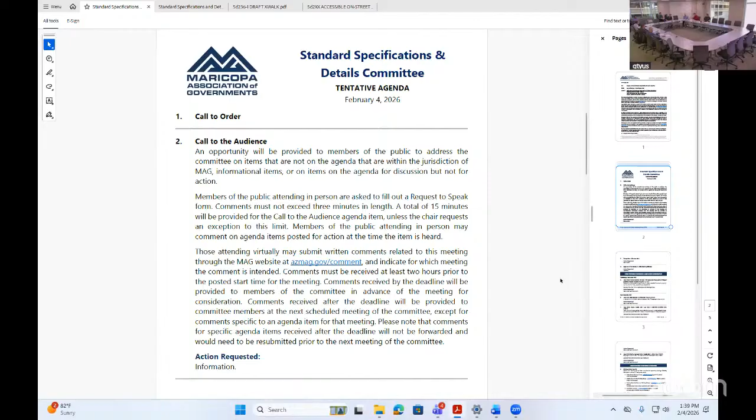Vice chair: If I can say one thing, Jose, yes, it's been a pleasure chairing with this group. I mean, these guys are amazing, there's a lot of talent in here. I really brag about this group all the time. So thank you, we're welcome to have you, and thank you for agreeing to be my vice chair my first year as well.

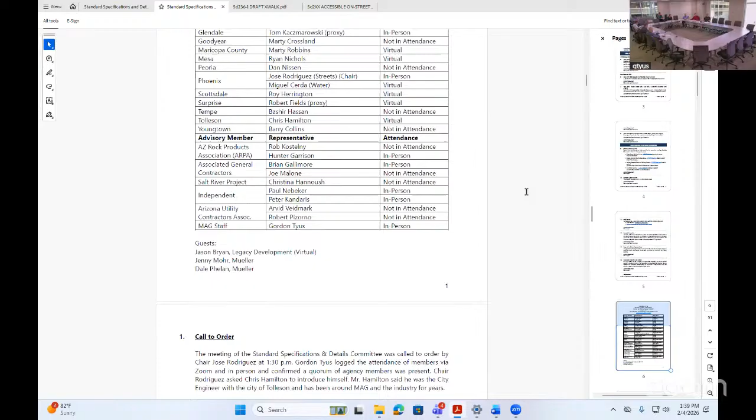So with that, we'll move on to the next item, the approval of the last meeting, January 7th meeting minutes. I think these were shared on the agenda packets when they were distributed. Does anybody have any questions from the MAG member committees? Or is there anybody from the public that wants to make a comment on the meeting minutes? Just take a few minutes to glance through it and let me know.

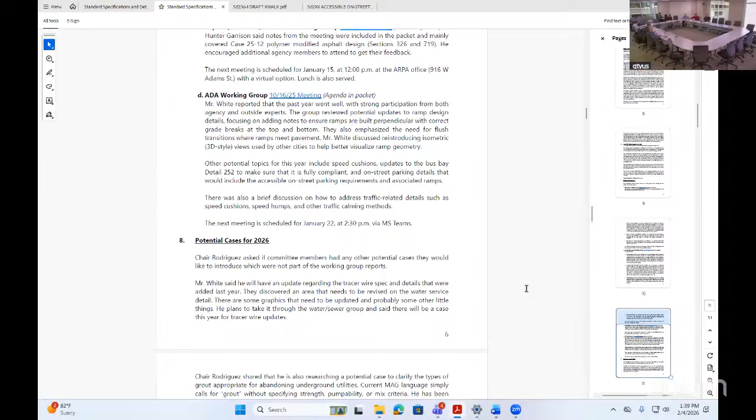And Gordon, just to confirm, I think you incorporated any revisions that we received through the reviewer, right? Yes, that's correct. I sent the draft minutes out to the chairs and case sponsors for their review and incorporated any of the changes that they had. But if there's any that we missed that other members have noticed, let us know and we'll get those corrections made as well. Also, while I have the mic, we have just a bare minimum for our quorum, so please try and stay for the entire meeting if at all possible. Thank you.

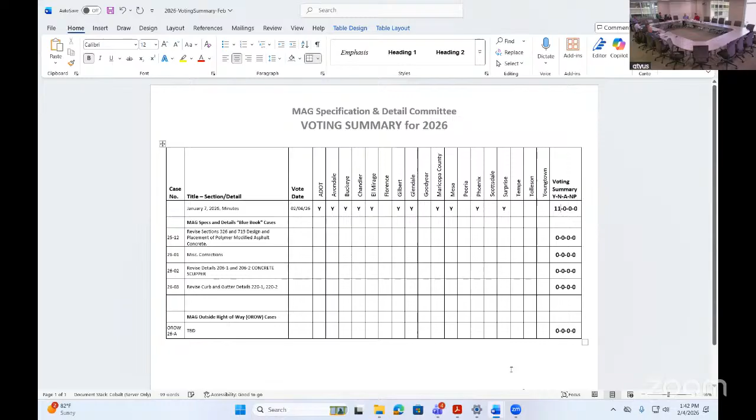All right, we'll move forward into our cases. The first is our rollover case from last year: revisions to sections 326 and 719, design and placement of polymer modified asphalt concrete. Alex, can you give us an update on that?

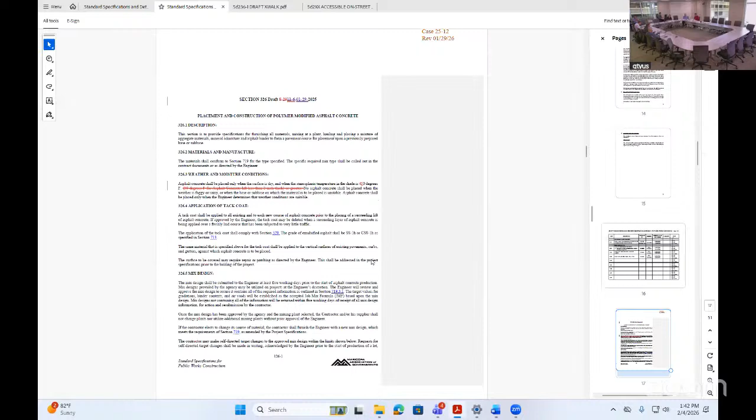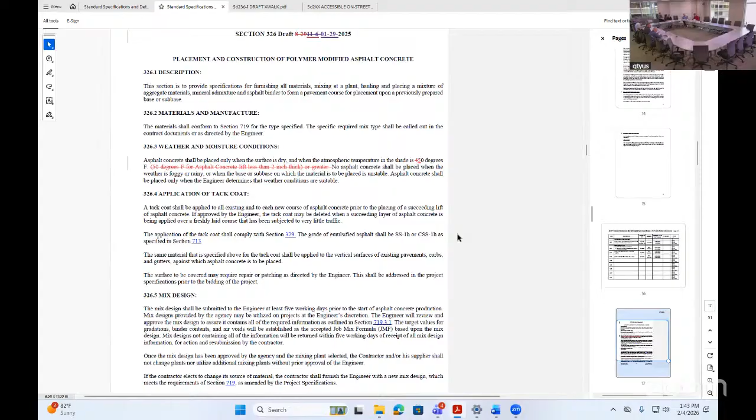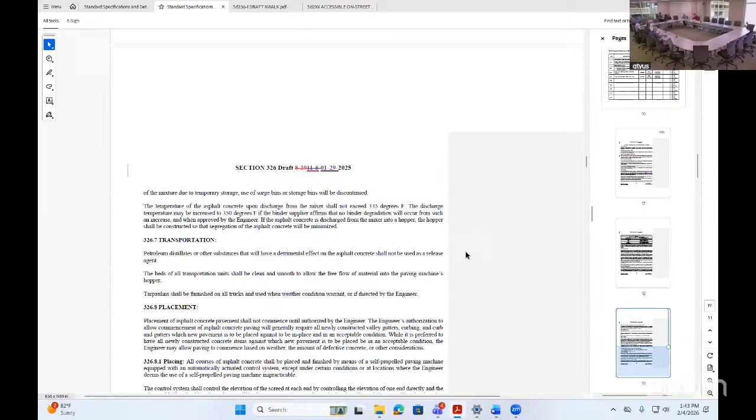Absolutely. A lot of work's been put in here by a lot of members of this group. We've had quite a bit of interest, and worked very closely, especially with the city of Phoenix and some of the East Valley agencies. There were a couple minor revisions to some language and clarification, specifically regarding the performance analysis and aging protocols. We think this is a pretty concise document as written, and we were going to move it forward for a vote next month if the committee saw fit.

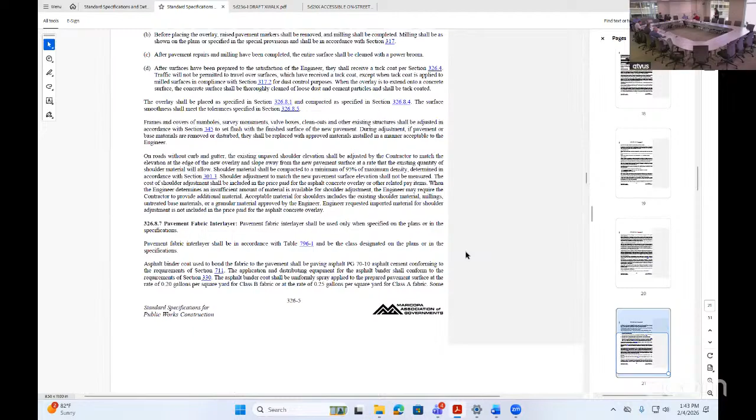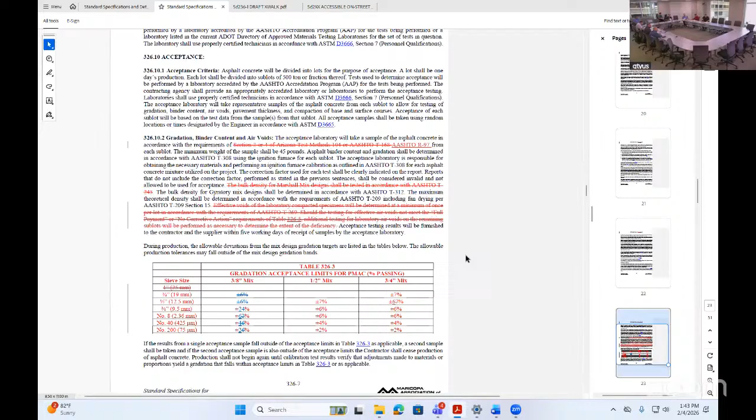Does anybody have any questions on this case? I know we discussed it quite a few times. Any comments coming up on your heads right now?

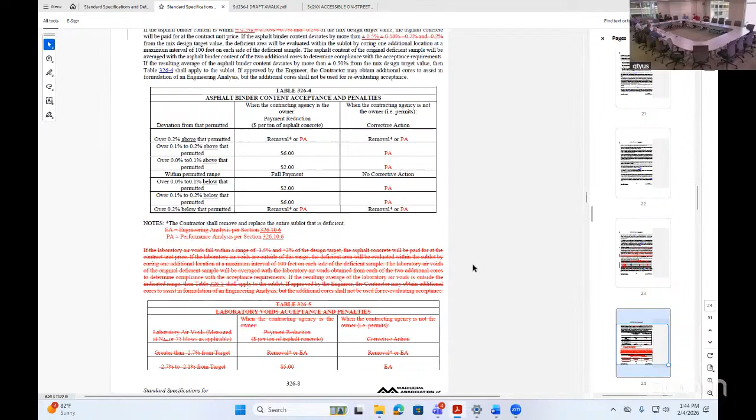I will say, Alex, as I was reviewing this, there are some comments that I'll get with Parnian at the lab, probably just to clarify. Previously the engineering analysis had language that needed to be done by a professional engineer and all that stuff, where we probably want to replicate some of that. And also, I think the qualifications for the lab performing the performance testing.

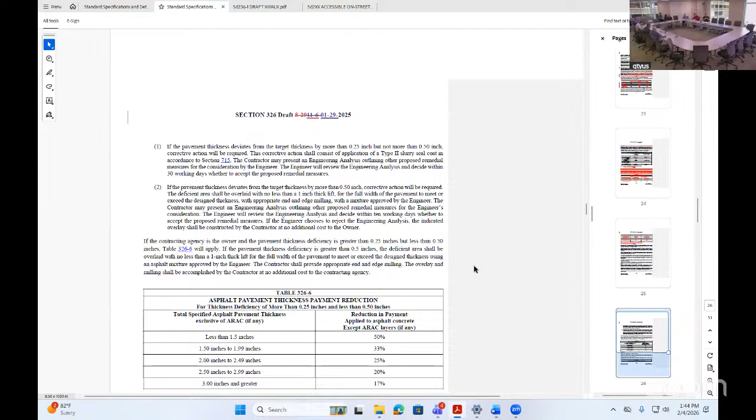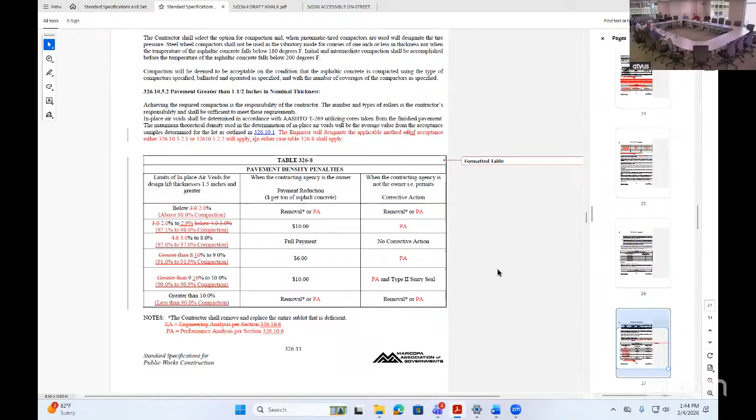Okay, I appreciate it, thank you Mr. Chair. The qualifications, Jose, I think we put language like if they were on your approved list, because you guys had a list of approved labs, is what we've done in the past. Yeah, something along those lines. I just didn't read that in the performance testing section.

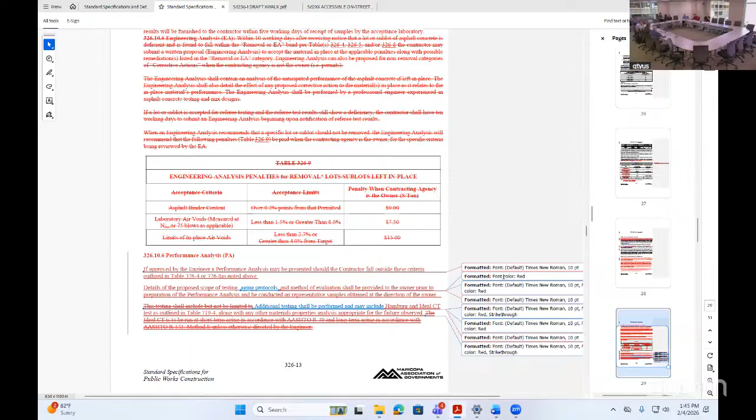Okay, because I think we might be limited, right? There are not a lot of labs performing that. Yeah, those tests are pretty specialized. But because of that, we kind of want to make sure that the lab performing those tests knows what they're doing, because they get very sensitive.

Yeah, she's been at all the meetings with us, so anything you get with her, we can tweak whatever language they want in our next meeting. And if there's any other members that have any comments, hopefully they can get back to you, Alex, and hammer it out at the next materials working group, and we can put it to potential action at the next meeting. Excellent, yeah, we'd love to see this move forward. There's been quite a bit of interest, so I think this is great. Thank you.

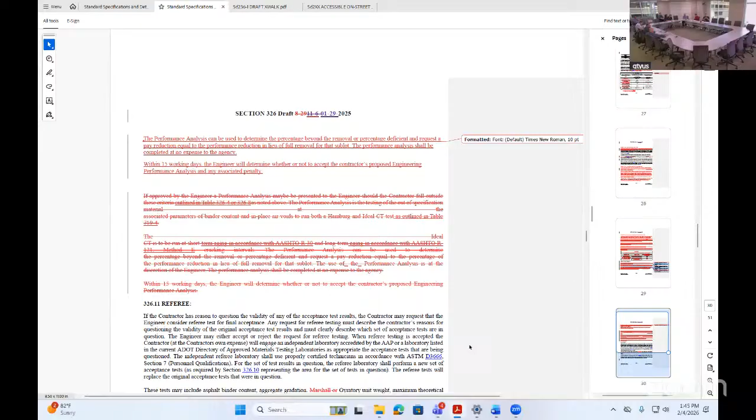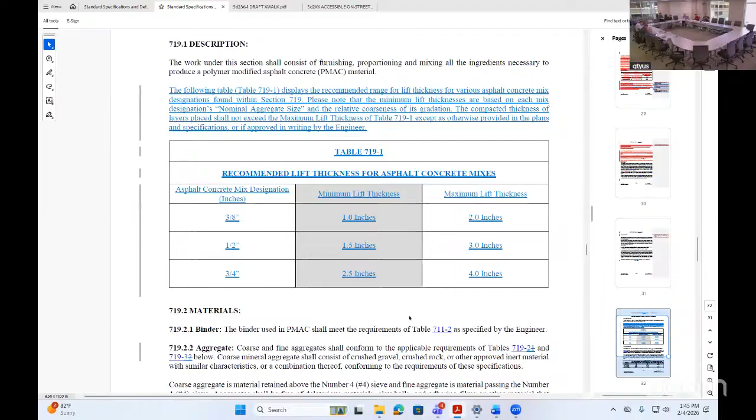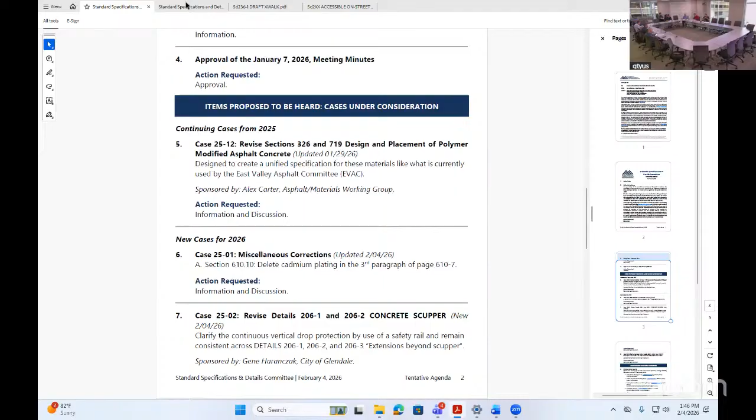All right, next, the first case for 2026, miscellaneous correction. I think there is no other item on the first item, Gene, correct? I think we presented that last time: the deletion of cadmium plating from the specification. I know at one point there was some discussion to make this another case. I just want to confirm whether or not it's gonna stay as a miscellaneous correction.

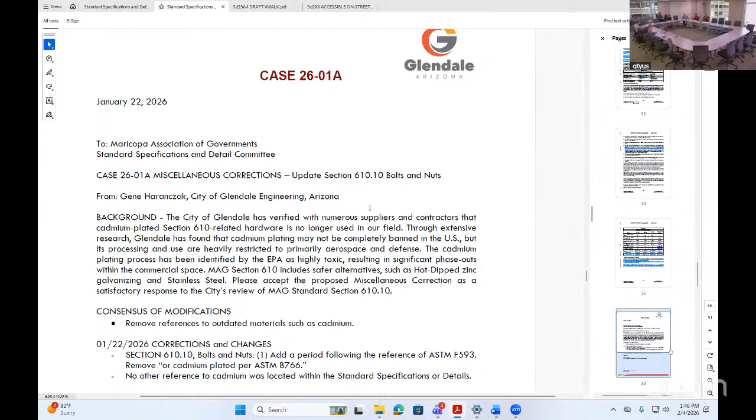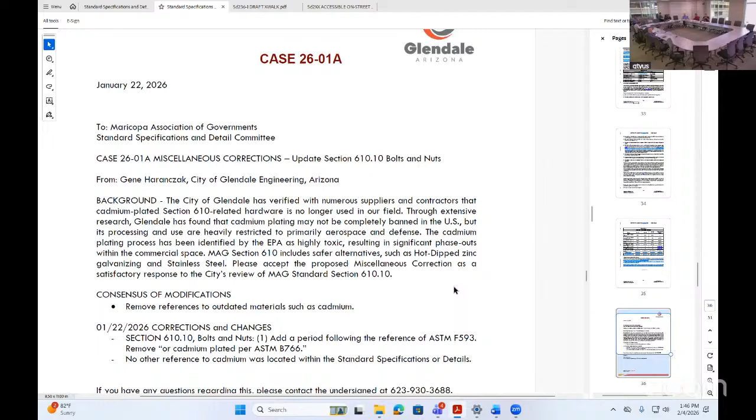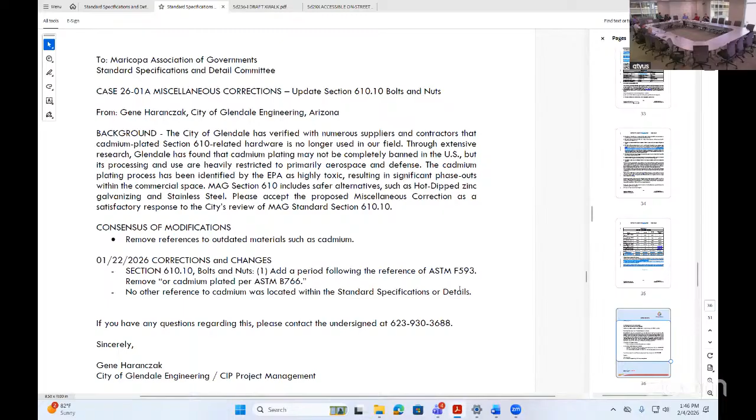Yeah, I would request that we leave it as a miscellaneous correction because we're just deleting an outdated process. The zinc coating, from what I found, is the galvanized process that's already called out in MAG. So being that cadmium hasn't been used in so long, we can just delete it out. It's not even available - I checked with many of the local suppliers, and they said they haven't supplied cadmium in quite some time. All right, simple change.

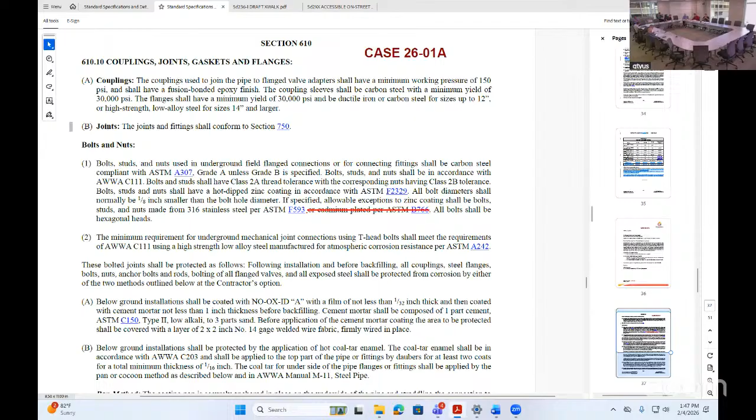There are no other miscellaneous corrections for this so far. Next case: revisions to details 206-1 and 206-2, concrete scupper.

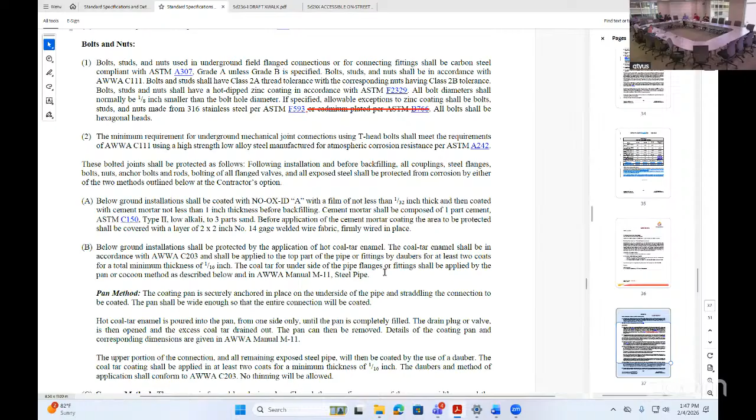Gene, can you interpret please? So that one in particular, I reached out to industry, asked Brian Gallimore here to run it through his group, to see if I was on the right page with how I was interpreting the detail. When I was chair, I received a few calls for clarification about that 1 inch at the gutter pan. I ran it through Brian's group, and they came back with responses basically in line, perfectly parallel with what I'm illustrating here. So it's just to clarify the measurements basically.

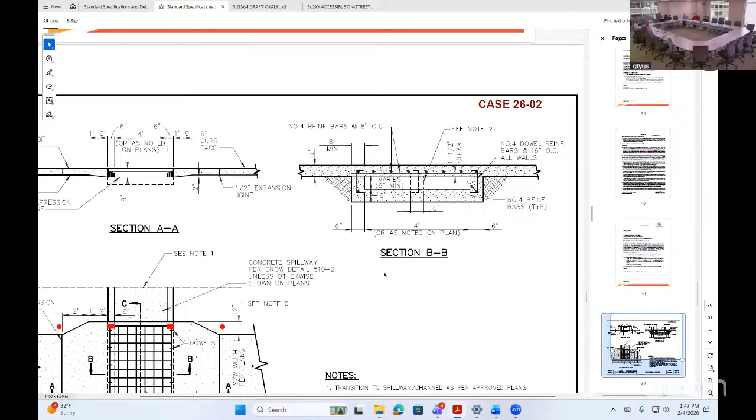Oh, I'm sorry, I thought... No, we were talking about the scupper. So this is the scupper. I'm sorry, let me retract - the extension of that, the safety rail on this.

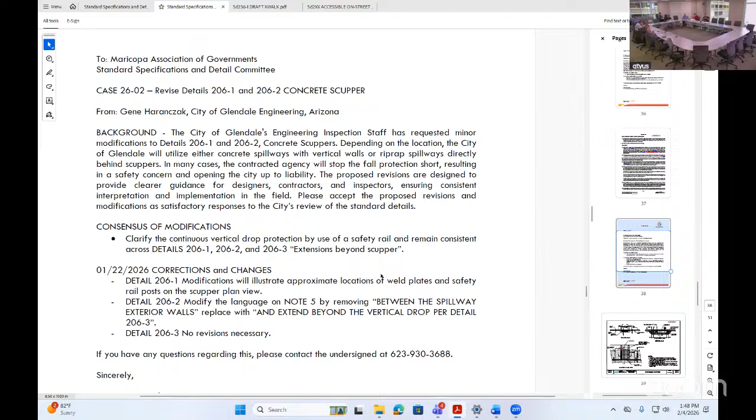So this one here, we're having a problem in Glendale with the scuppers falling short. The way it's currently written is that it stops at the edge of the spillway. We're using a lot of riprap channels, so the safety rail isn't extending past that vertical drop. So we just want to carry that language over to capture all the details.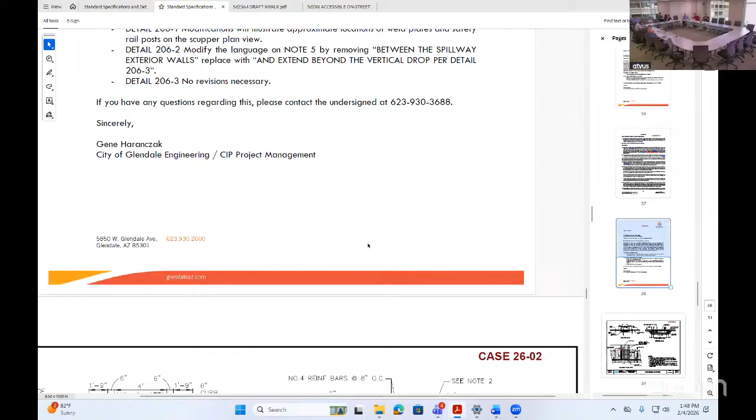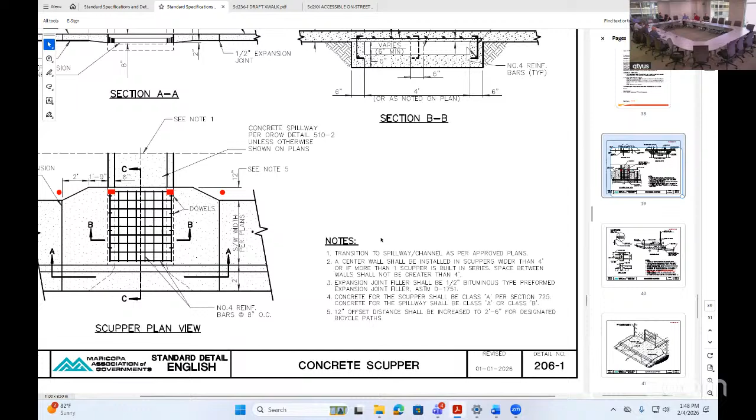It's going to be the 206-3, which clearly shows the rail going across, but what's happening is they're just stopping it right at that angle point on the back of the scupper. So on the first detail, 206-1, if we can just show those two weld plates - the direct bury would be per detail 145. And then we just slightly modify one of the notes there to extend beyond the vertical drop per detail 206-3.

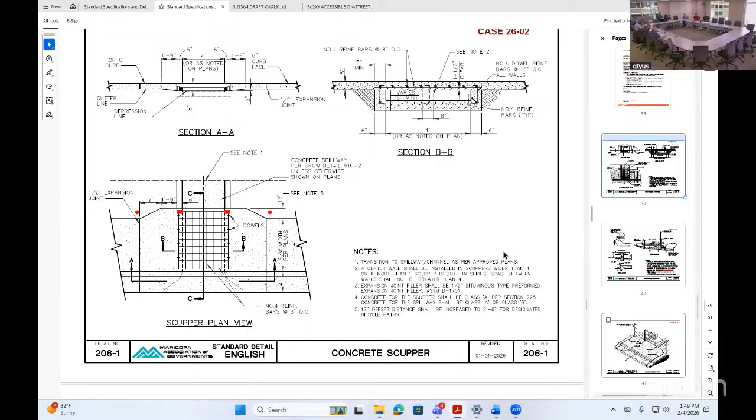That would help us out a lot in the field, not having to have contractors come back and spend time out in the field trying to sort through all this. It would really clarify things - I think it's fair for us, and fair for the contractors because they don't want to come out and mob twice to go weld on additional rails. So that's what really brought this case up. The inspectors kind of pounded on me for it.

Just a question for you, Gene. Now, so the extension of that rail, even beyond the actual fall off, because there may be landscape area where you're actually meeting grade at that point, right?

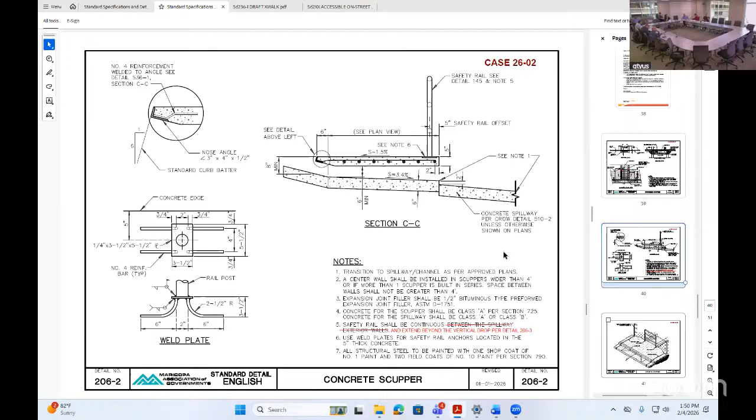Right, just for consistency, and that's why I left it open as beyond the vertical drop - so that we're capturing that vertical drop. Now, the drawing clearly shows it at the expansion joint, or right there adjacent to the expansion joint, which, if you want to fine tune that language a little tighter, we can.

I personally think it works pretty good the way it is. Beyond can be interpreted, though. I totally understand - beyond can, I mean, where are we gonna stop, you know? When we get to Chandler, you know?

We touched on this a little bit - the 30-inch measurement that Warren brought up. Yes, what would - oh, thank you, Brian. Yeah, there was a discussion at the ADA working group of what would trigger the safety rail, so that we are not improperly adding safety rail where it's not required, because it becomes a maintenance headache at one point.

But I think in this particular case, the intent is kind of showing what's already on detail 206-3. Sure, I would agree with that 100%. And our whole outlook on this is behind the sidewalk for landscape, we generally have a 1-inch reveal, then you have your landscape rock. When you have anything more than that, you're opening yourself up to liability, right?

Wheelchair goes off, tumbles down. I think if we modify the same language any more, we would maybe just say, instead of beyond the vertical drop, we could capture the vertical drop and maybe to the expansion joints, because that's generally where the wings of our riprap channel stop - right about there - and we try to capture that vertical drop. And the way it's drawn on -2.

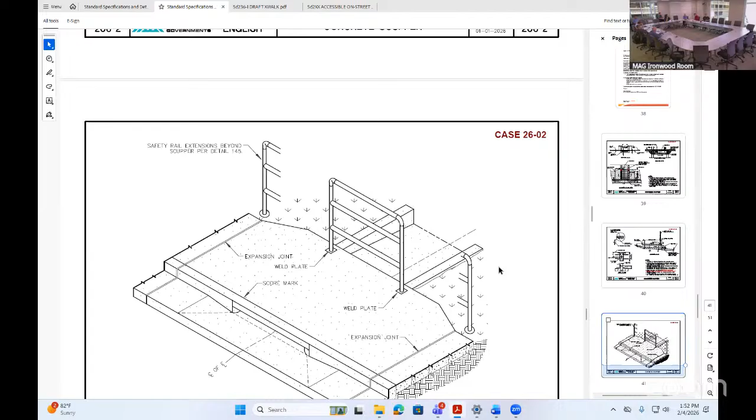Oh, I'm sorry, no, not -2. Are you looking at -1 or -3? The way it's drawn on -3, it's drawn right at the vertical supports there, right at the spillway. But then the note says between the spillway exterior walls. And that's my challenge - I need to get beyond those spillway exterior walls because I don't have any, so I need to just capture the vertical drop. And that's really the motivation behind the change.

Question for you, Gene, if you don't mind. So the note you're proposing says beyond the vertical drop - is there an elevation drop at which the safety rail becomes necessary? Because I'm thinking street side, you've got a 6-inch drop everywhere, and no safety rail, obviously.

So, because you had mentioned if you normally have a 1-inch reveal on the backside of the sidewalk to landscaping, anything more is liability - but is there a certain elevation change where the safety rail becomes necessary versus not? I don't know if there's a hard, fast rule.

I know anything over 1 inch could be an issue, potentially. I could look into that and come back and see where that's derived from. But really, the goal is to keep a wheelchair from going off into that riprap, right?

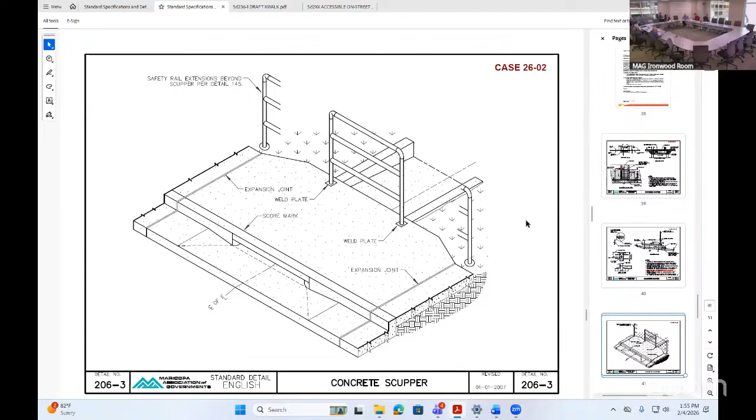Mr. Chair, yes. I was trying to remember in our discussions, somebody put in the feed and I meant to take a note of it, but it wasn't OSHA. I was always thinking it was OSHA, but they found it in another design standard where 30 inches was the stated figure.

Yeah, 30 inches is building code, but it was beyond building code. It was something else—a highway design standard. What is the other? AASHTO. Oh yes, AASHTO is what it was stated. So maybe check out AASHTO and see what you think of that language too.

Yeah, that's probably more for your head walls, I would imagine. And I think I'm with you, Gene. I think we just need to clarify this particular scupper detail. I think we were looking into potentially modifying the actual safety rail itself or its application.

That detail, I think 145, we'd be having the conversation about the drop, but if you disconnect the required limits from the vertical drop, then that falls out of question. Okay, fair enough. Thank you. Thanks, guys.

This is Peter. I had a question or a thought on this. Is it okay for me to talk? I can't tell very well if I'm communicating. Go ahead, Peter. Okay, good.

So this gets me to think about—this is an issue that really, I think you're dealing with the scupper issue correctly, but do we have a specific issue that should be addressed behind the sidewalk in all cases? It sounds like certain municipalities do address it, certain don't. Is this something where, with the appearance of a slope behind the sidewalk, would require some kind of protection system? I'm just throwing that out, irrespective of this case. Is that something this committee would be interested in?

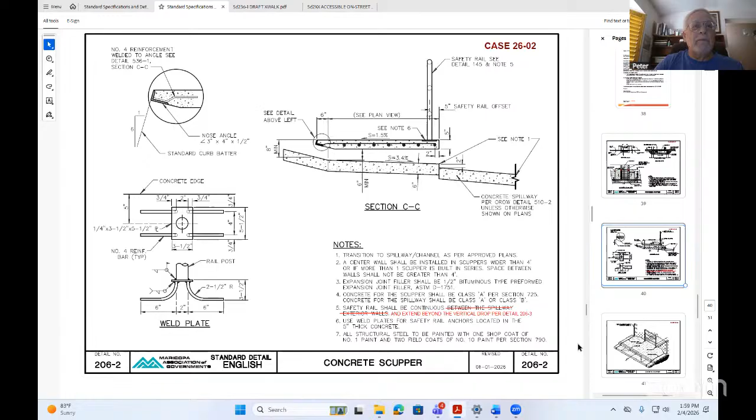All right, next item. Or, I'm sorry, does anybody else have any other question or comments on the scupper detail? Nope. Mr. Chairman, this is Josh Ford, City of Buckeye.

Hey Josh. If we're cracking open this detail, one comment I'd have is that slope on top, the view you're looking at right now shows 1.5%. I know with the sidewalk detail we modified that to say target slope 1.5% from top of curb, and on the 230 sidewalk detail we have a note about slope tolerance, 0.5% to 2%.

I'm proposing that we include some similar language about target or giving some type of tolerance, because I know we dealt with a contentious scupper issue before where there was lots of back and forth over the slope on top and the slope on bottom. Just looking to maybe make this consistent with what we're doing on detail 230.

Great point, Josh. Gene, is that something you can look at - to see what the slope callout is for the sidewalk detail and just match that so it's consistent? Yeah, because right now S equals 1.5% on the 206-2 detail. Okay, so yeah, I'll make sure it stays consistent with 230.

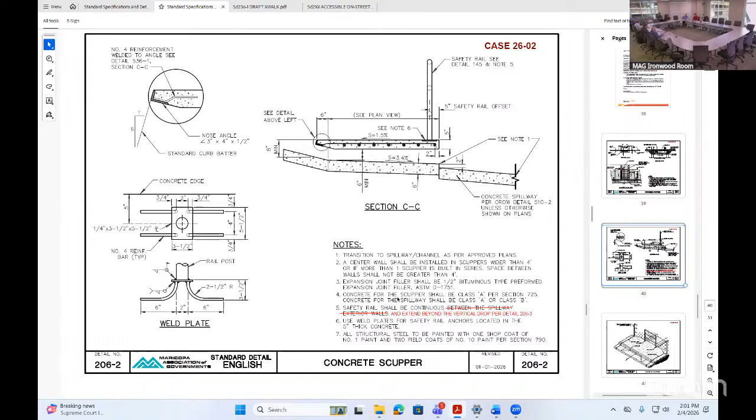Thank you for that. Absolutely, thank you.

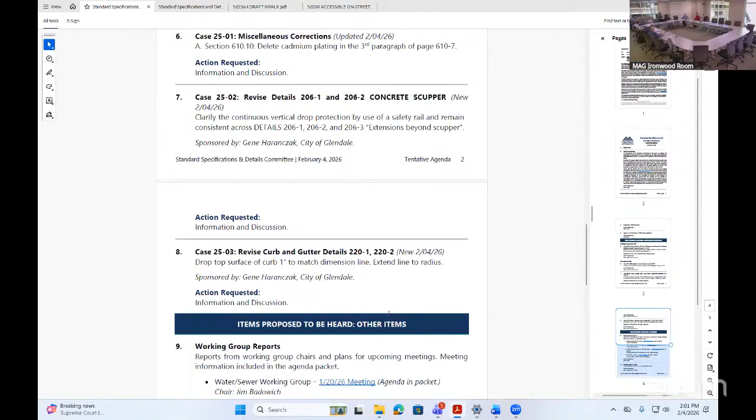Next case, 2603, revisions to details 220-1 and 220-2, curb and gutter. Gene, is this your case as well? All right, walk us through it.

Mr. Chair, I was so excited to get to this case, I couldn't wait. This is the case I received many phone calls on as chair, just looking for clarification on some of these measurements. This is also the case that I handed over to the Associated General Contractors and had them look at it.

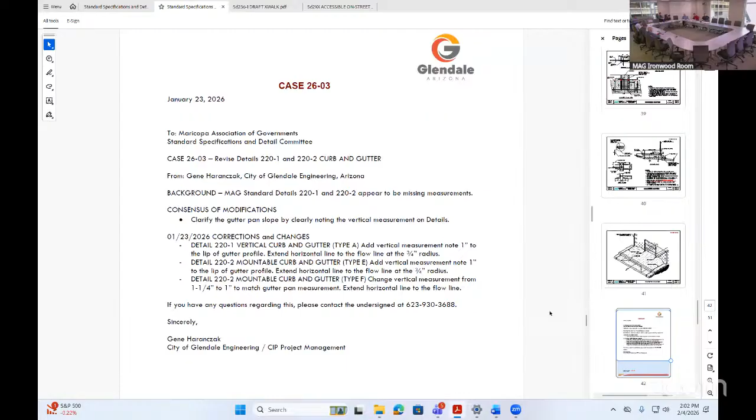Their response was consistent with what I'm showing here on these pages. They were in 100% agreement with these notes. So it's simply to clarify this. I don't think this warrants a miscellaneous correction - I think it warrants an actual case, in case anybody wants to add more to it. So with that, I'll open it up.

No, I don't think so. Most of them were worried about the bottom - the bottom's usually cut flat, you gotta have that. The real critical one is your designer - like when they put 2% cross slope in your roadway and design to a flow line that's an inch lower than the lip of the gutter, but we're paving to the lip of the gutter a 1/4 inch above. So it throws your slope all off, right?

And we've had that argument with designers saying, hey, look at the detail, we gotta pave a 1/4 inch above, and you're designing from center line to flow line - it doesn't match, right? And your mic's not on.

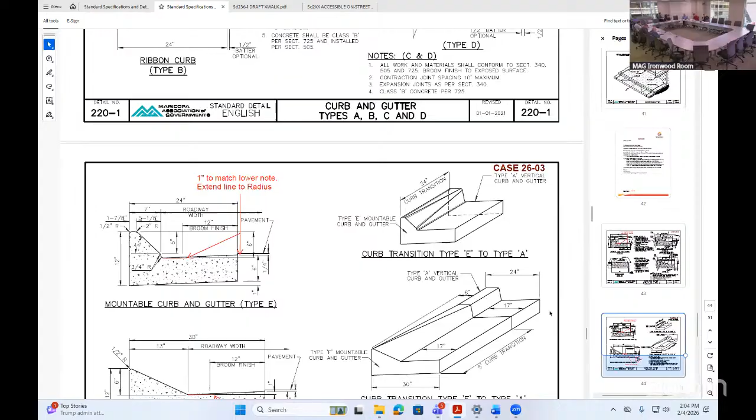Just missing measurements as far as I can tell. And as I'm looking through the case, is this just being carried across all the different types of curb and gutter details? No, that's correct. Any ones that were missing the measurement, that is correct.

Based on Brian's comment, are we thinking of flattening out the bottom of those? Actually changing the drawing and flattening it out, or? If I may, I don't want to get into that because then we're going to throw yields off potentially. The way it's drawn right now, they are keeping some kind of, when they grade that road, they're probably grading through the curb and gutter subgrade with some slope. But really the trick is I don't want to throw their yields. If I make that flat, that little wedge might not be much over 10 feet, but through a whole subdivision, it's going to add up.

You could make that 1 inch at the bottom optional. That's what I found out when I asked everybody, right? Some of them do, some of them complained about yield. Some say we just cut it flat or trim it, using a trimmer in front of the curb machine. And I did get some pushback from contractors. I had reached out separate from you, and they had mentioned the same thing, that their yield would go up. I mean, they'll have to adjust their pricing accordingly.

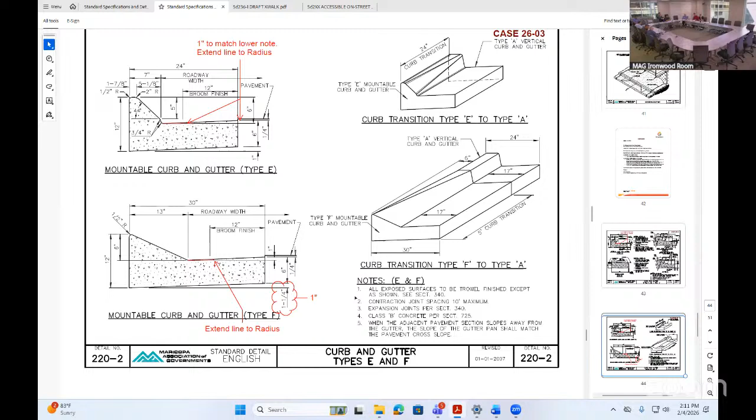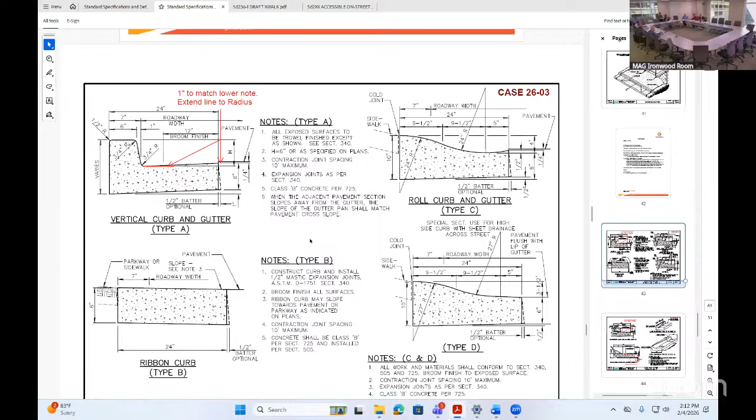It is really hard to see. Yeah, I was trying to wrap my head around that. But the question I had was relative to the gutter pan, nothing underneath the subgrade. Gene, I think that same question applies on type A. The 1 inch lip we're talking about goes from flow line to lip of gutter, but the 1 inch at the bottom appears to go from the back of the curb to the lip. So those lines technically aren't parallel, right? They have different slopes. For type A, it's not drawn to the back of curb - it's drawn just slightly below the flow line or the radius. We can make that consistent if we need to.

Yeah, I might need a little assistance with this one. I think one of the tricky things is your extension lines normally have a gap, but at such a slight slope, where do you stop that gap without running into the line? So the gutter pan originally - the unmarked line for type A - stopped right underneath the gutter pan, basically at 12 inches, just short of the broom finish, and then you go into the shiner. The line never extended through the shiner to the flow line, which I thought was kind of odd.

I wasn't around when this detail was originally put together - well, I was around, but wasn't involved. So if any committee members have insight on this, I'd like to hear it. So I do remember some of this. That's what I wanted to hear. Yeah, that's the disadvantage of being old. No, I do remember some of this.

The ratio, the 1 1/4, comes from the ratio of 30 inches over 24 inches. That's as simple as it is, it was just ratioed out. If you look at the standard one, which is 24 inches, and you look at that one, it's 30 inches - that's all it came from. It was just a thinking that it's easier to do it that way, but I see the rationale that you don't have to do it that way. That's all it came from.

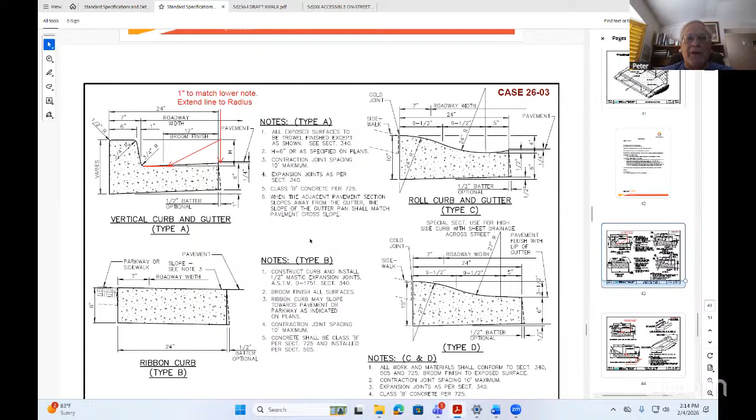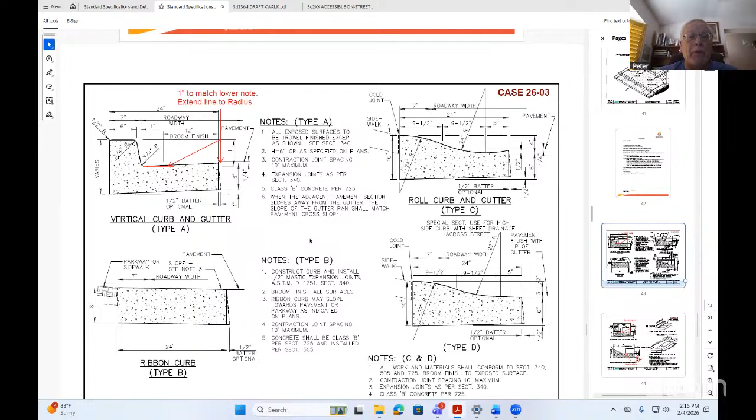So the bottom subgrade line for the 1 inch, that's supposed to carry all the way through the back. Yeah, that's correct. So I see the rationale then. Yeah, that was the rationale behind it, not that it was necessary, but it was visually seeing it on the screen. I think you're right, we should probably just continue these to where they belong. I don't see a reason to go to 1 1/4. It was just to keep the thickness consistent - that's the point that was made, the thickness is all we care about. We don't really care what it looks like on the bottom. That's correct, okay, that's what I remember.

Wow, it's great having dinosaurs, isn't it? You got me for a few more years. Oh yeah, I love it. Thank you, Peter.

Gene, we go back to the idea of just getting rid of the bottom 1 inch altogether and calling it a 6-inch minimum. Then you don't have to worry about where the leader goes - is it the back of the curb, is it the flow line or anything like that - and you simplify the whole detail. Well, I'll let the committee chew on that for a little bit, because I don't know if we'll end up raising a future question if there's a pattern or an angle or slope on the bottom - what is that supposed to be?

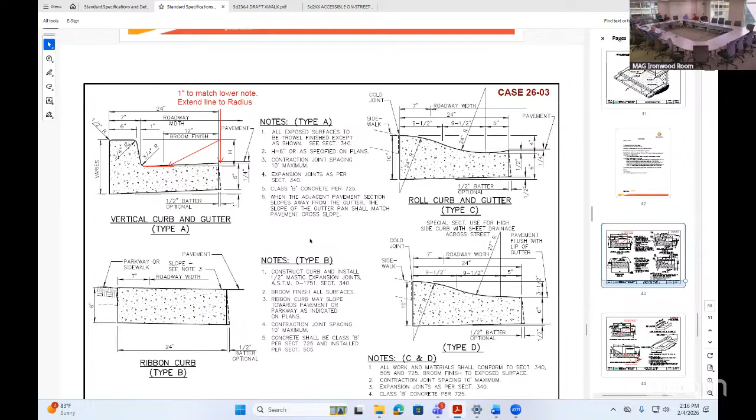It hasn't been an issue, but maybe it wouldn't hurt to clarify it. But yeah, I guess we can talk about it, and if anybody else has any comment for the future - I think Mike, you have your hand up?

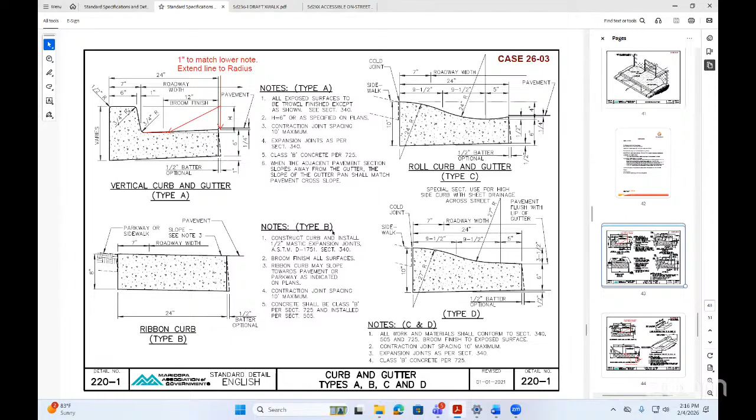Yeah, there's a lot of dimensions on here. I took a look at some of ADOT's details, and I'm not saying they're perfect, but they have tables that specifically call out gutter depths. The sole purpose would be to remove some of the dimension strings and provide some clarity, consistency, and less interpretation. Just a suggestion to consider. It's a good idea, thank you Mike.

One thing, Mr. Chair, before we move on - I will reconvene with Brian to run it through his group and see if there's going to be any opposition or challenges from the construction standpoint. I don't want to throw a wrench into what they're already doing and have them have to retool, especially for their slip machines or slip forms.

I noticed something a little different between type A and type C - the 6-inch dimension, if you're dimensioning the concrete, we might want to move that dimension in type C as well to match. You see that on the right side? It's going down to the bottom instead of - yeah, you see that Gene? Yeah, I do now, thank you.

Yeah, but it technically goes to the leader that's supposed to be pointing all the way to the back - it's just a CAD issue. Yeah, it's the wrong line.

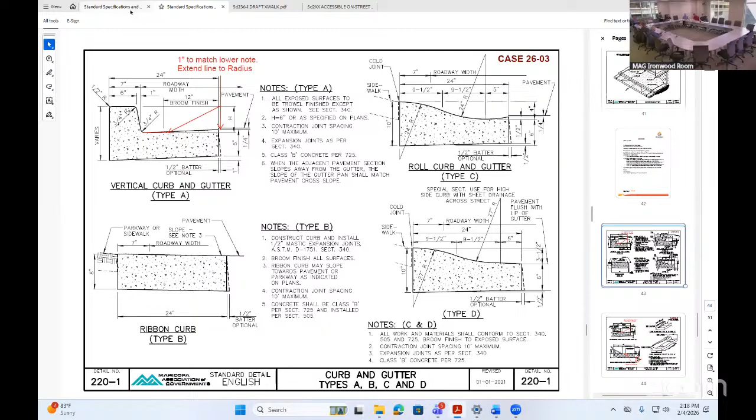All right, let me get back to my agenda. I think we're done with the cases - let's go into the working group reports.

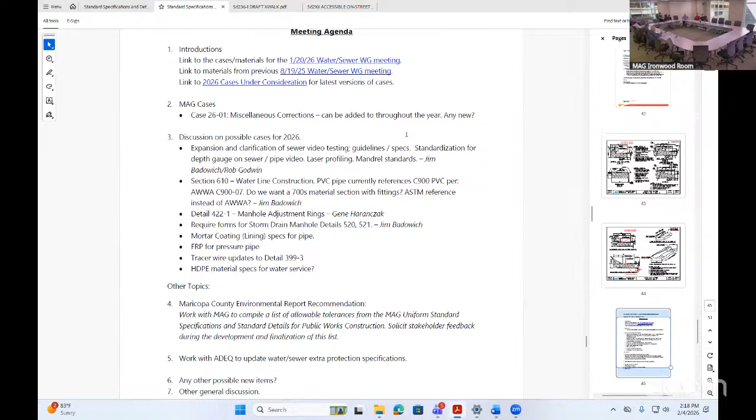Let's start with the water and sewer working group. Jim, would you mind giving us an update? Yeah, Mr. Chairman. So we met on January 20th, it was online only. Basically what I do for the first meeting of the year is go over an overview of the purpose of the working group and our relationship to the main committee here, so I did that. I provided an overview of what we do as far as water and sewer goes, gave a quick update on the cases that were approved with the help of Gordon, and an update on the new specs that are out for January.

And what else - so Gene brought up a thing about PEX, which is now an available material in MAG. One of the manufacturers has a class action lawsuit, so he just gave us an FYI on that.

And then I talked about the miscellaneous corrections standard, the first case of the year we do. So as anybody goes through, if they have any bloopers or typos, they're going to bring it to our attention, so we can get it on the main committee here as part of that case.

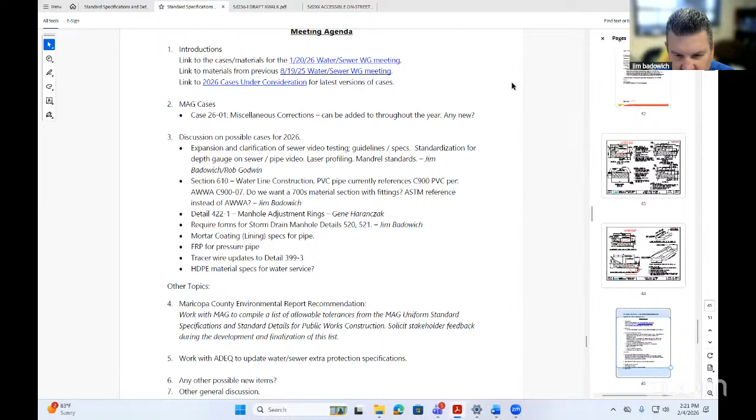What else came up? Some other possible cases - I think we need to update a few ASTM standards that the industry's brought up on ductile iron pipe. So you'll probably see that come forth, just as we do with a lot of other ASTM updates, to keep MAG current with the national standards.

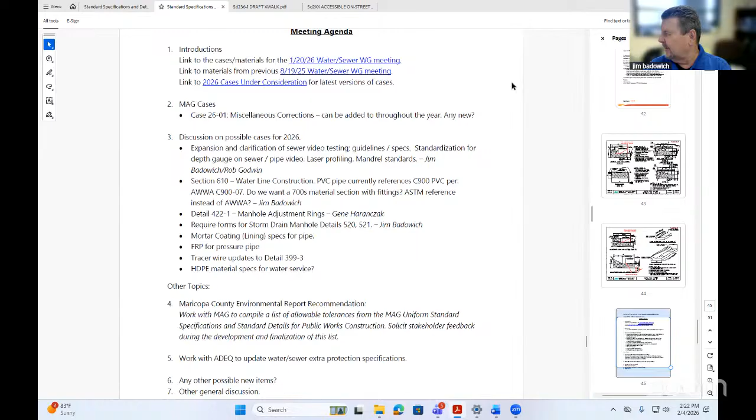And just to get an update on Jim and the agenda shown on the screen, there's some discussion about - I think this leads back to extra protection and discussions with the county and ADEQ.

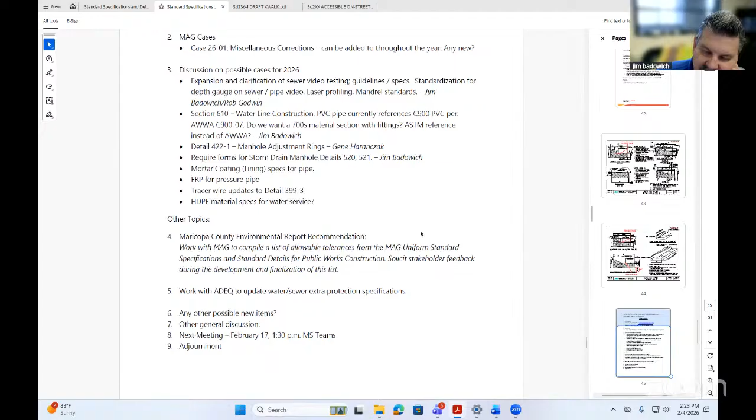Yeah, we'd like to maybe resurrect that. I understand they're going through some revisions, so we might want to participate with the county on that. Hopefully this is a chance to finally update that old bulletin - was it from the 1970s? Bulletin 10 and 11. So maybe we can do that. But yeah, the extra protection thing really needs to be updated.

As most cities and contractors really struggle with the old-fashioned concrete encasement - I really don't think that's true encasement, and it's very difficult to build in the field, so that's a good point. All right, thanks for that, Jim.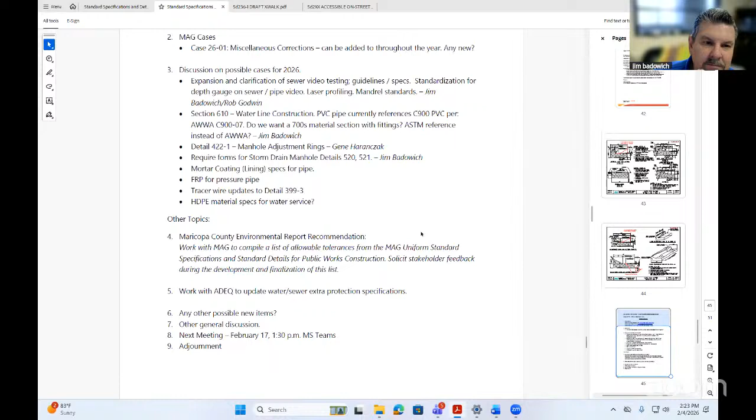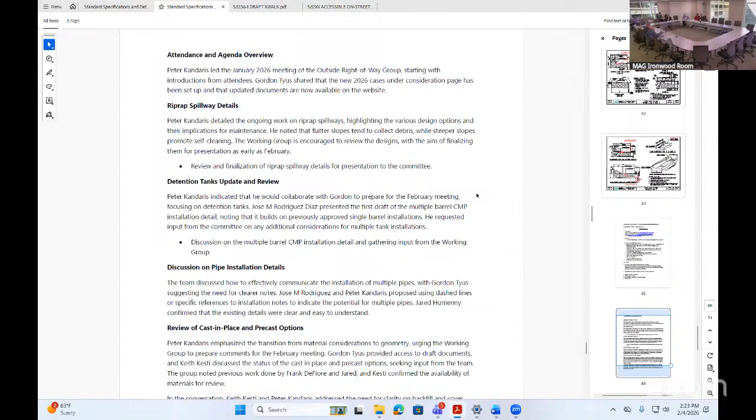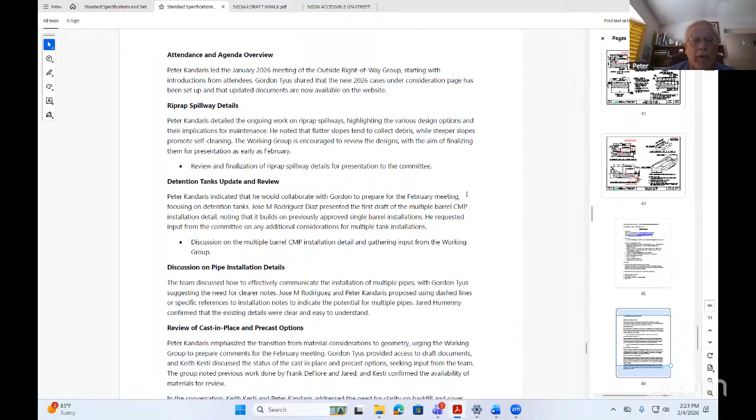Peter, can you give us an update on the outside working group? Yes, Mr. Chairman, thank you. We had our meeting on January 22nd, the first of the year. Gordon gave us the update on the existing MAG outside right of way, the updates that have been incorporated into that document that's now available on the website. We hit the ground running this year because we had some things in the queue ready to go, at least in terms of ideas or concepts we've been working on.

So the riprap spillway detail - we've got the existing concrete spillways, now we're moving into the riprap. Did a review of those and asked that anybody in the working group, if there's any more comments, let's get them in so we can finalize this in our meeting this month in February, with the goal of having a case brought forward in March. So our goal is in March we're going to be bringing everything forward to you guys to have an actual case going on those riprap spillways.

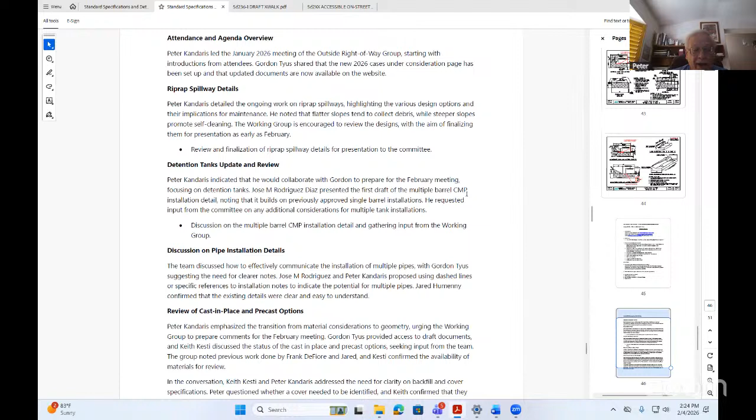The other one that has a great deal of energy going on are the detention tanks. We finished the detail last year on a single CMP, now we're moving into several ones. Mr. Chairman, you're intimately involved with these, which is the multiple barrel option for the CMPs. And then the other types of detention tanks are now moving forward - the precast option has probably got the most work that's been done on it, and that should be continuing to move forward.

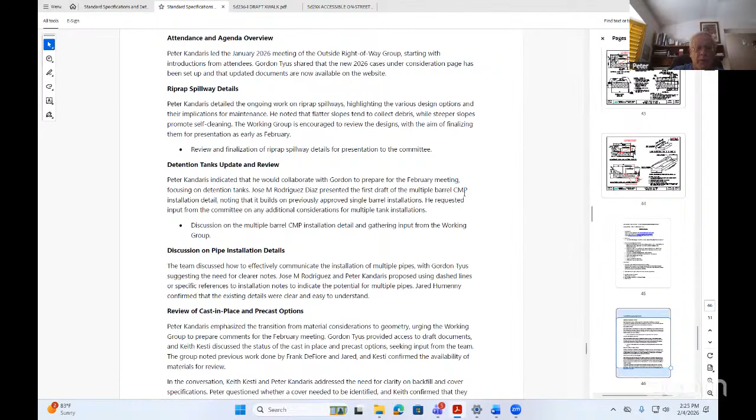We're hoping to bring that one forward - I think we'll plan to bring that one forward this year. There's some discussion on backfill to make sure everything was consistent on that. And then, of course, the other one would be the cast in place details - or I'm sorry, into the cast in place, we've got the precast detail, which industry is bringing forward. That's Adrianna Lash that's working on it. We'll try to do that. The idea is we have all of these parallel now, so we got the basic hard work done last year.

This year we get to start expanding that and filling in everything that we hadn't done before. Probably the only thing that'll be missing this year will be the polymers and things like that, but I think good progress on that.

The other items we'd probably be working on, Wayne Colebank brought up the need for more clear standards regarding riprap aesthetics and placement, and that hasn't been touched in decades. So Wayne is going to start working on that and hopefully have something to present to us at our February meeting on updating Section 220.

The handrail design, obviously you talked about that. That was brought up in the working group and then handed over more to others to work on. So that's already been discussed.

And then again, we talked about coordinating any other ADA issues, just like I was bringing up potentially - is there something on the ADA we need to look at outside the right of way? We kind of left it at that for this meeting. I think we had quite a bit to work on. We're going to try to expand to other areas that we talked about, probably at this next meeting, which is scheduled for February 19th. I'm open to any questions.

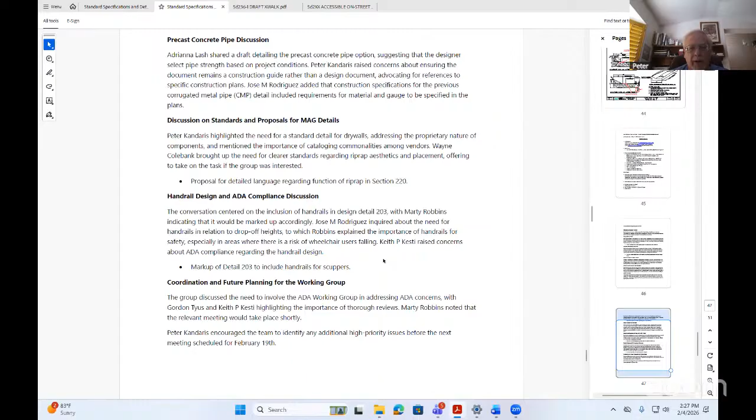I think the 19th is the Thursday. I'm kind of losing track of time - I've been sitting at home for so long, for three straight weeks with a knee replacement. So I'm trying to remember if you need an extra week to push that back because of your surgery, but yeah, I'm doing great. As of Friday, I get to start driving. So no, the knee replacement's gone fantastically well. I just finished therapy before this, and I'll be out and about well before the next meeting. So I'm easily able to start working on stuff now. Well, glad to hear that you're recovering, Peter. Yes, relatively pain-free - I've heard a lot of people have a lot of pain, but I really didn't. So, no, thank you. I appreciate it. All right.

Next working group, Asphalt and Materials Committee, Alex. Appreciate it, thank you Mr. Chair. Our last meeting was on January 15th. We talked primarily around 326 and 719, the final changes to bring forward on that today. No new potential cases came up at that point.

We did have some general discussion about an approved list. We have seen MCDOT moving forward with publishing an approved list. We know the city of Phoenix has one and Mesa has one, and we're still as a group collectively looking at how we could potentially have something that really encompasses the majority of MAG. One of the things that MCDOT brought forward was a challenge they had with their approved list - actually ADA compliance regarding the approved list and making sure it was able to be viewed and understood online. So I don't know if somebody here might be able to help them or has experience going through that themselves.

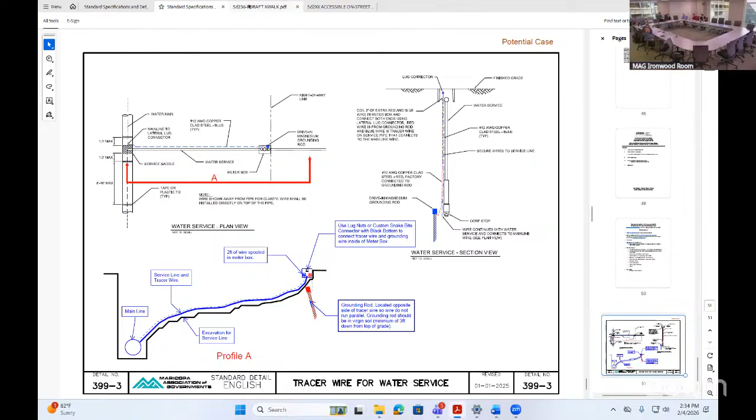So number one, I just wanted everyone's input on whether this is a case we should move forward with, and if you have any thoughts on whether this is the best place to do it, or another method.

I'd like to ask any of the members here or online if you have any thoughts on how to potentially address this, or first, I guess the question is: is this needed? And second, is this the best place for it?

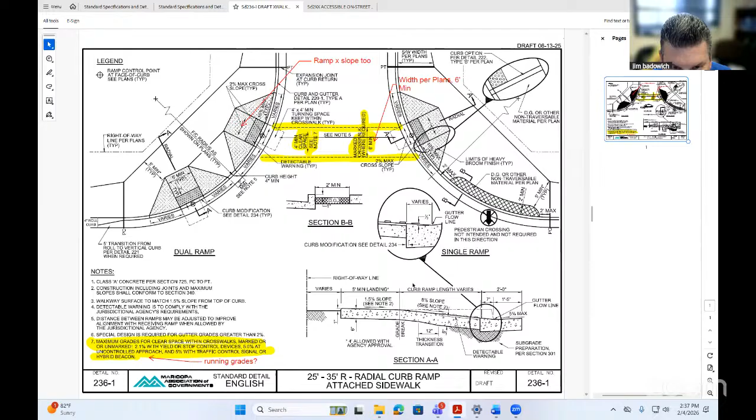Well, it's related, but I think the problem is you're going to get too busy, as you can see already. So it may be better to have a separate detail, because it might apply to different details, otherwise you're just going to be replicating it on all the details. Maybe just do a separate detail for crosswalk alignment and try to cover as many ramps as you can. Thanks for that input, Jim.

Brian, were you going to say something? Warren, the percentage of slope, are you talking about in the yellow hatched areas across, or are you talking the actual ramps? It's related to the yellow hatched area, but you're right, there are some allowances for the cross slope of a ramp if you're in a situation where you have a lot of vertical.

Where we're running into challenges is all your folks doing mill and overlay, built to that. The only ones who've really addressed it is Phoenix, where they're having us maintain the existing slope rather than just cutting a termination and raising the road profile up 1.5 inches or an inch - they're maintaining whatever it is.

So going down this road might create challenges when you're in your overlay program, or any kind of seal coat, sandwich or chip seal. This is really new construction, but if you get into alterations, you're right, then... I don't think the expectation is that you're going to regrade the road necessarily, but they're trying to maintain it.

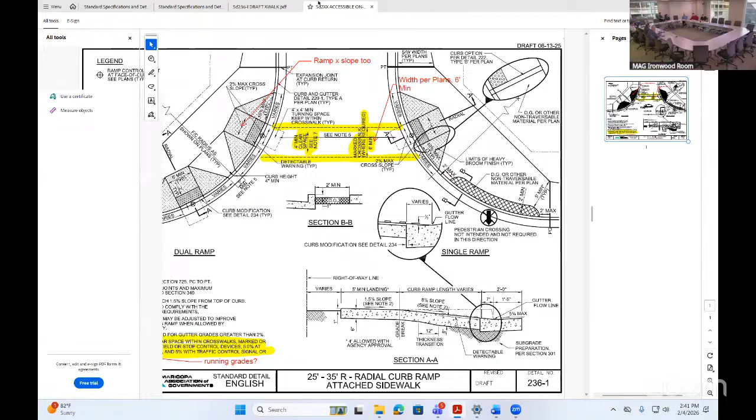The other item, which I didn't mention in the ADA discussion, was the desire from the working group to add a detail for accessible on-street parking into MAG. This is based on Chandler's detail. It's more of a work in progress at this time, but I wanted to share it and see what your thoughts were.

One thing I like about taking our Chandler details and converting them into MAG is I find out things like, we should have done this or that. It's a good process. So this covers both accessible angle parking and parallel parking. What's missing is a perpendicular case, but we can add that.

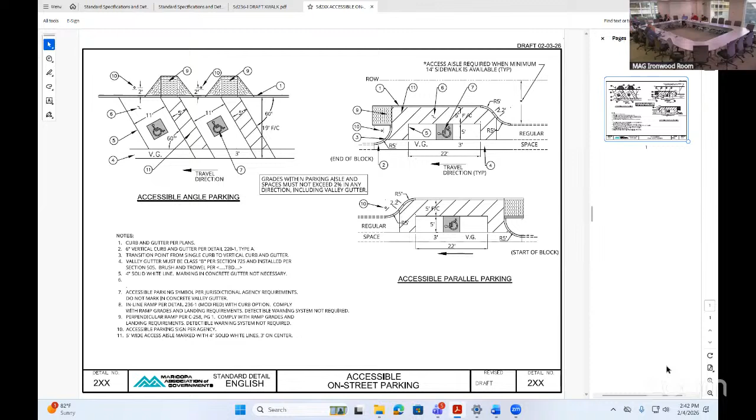This is based on parking with bulb-outs that we've used in our downtown. We'll have to look at this, and it's definitely going to be a scope creep type of case, because we'll have to account for other types of ways these get sited. I'll share the parameters from PROWAG on when you have to place these, and I'll add that to the case header when we do the formal case submittal. Anyway, just putting it out there.

Does the main committee agree that they'd like to see a detail like this as well?

I don't think it hurts anything, I think it helps everybody. I don't know where I'd be fitting one in downtown Glendale, we don't have enough sidewalk real estate. But I think the rule is if you have any marked or metered parking, that opens the door where you then have to have some on a block basis.

I think what would help, if committee members think there's a need, is finding out if any agencies have installed this type of parking and what that configuration looks like, because this is very specific to Chandler. Not all municipalities will have the bulb designation, but there might be other examples we can borrow to come up with somewhat of a standard.

Mr. Chair, I'm not saying I'm opposed to these details, but I've always thought of MAG standard specifications and details as being construction details - how do you construct a certain element. Both this one and the last one, now that I think about it, are more conceptual design concepts. They're not details telling you how to construct something, they're telling you how to design - where do you place striping, or where should you put a flat slope versus a non-flat slope. There's not a lot of construction in these. I'm not necessarily opposed, but it's shifting details that I've traditionally expected to see in MAG documents into a design manual type of detail. Just something to think about.

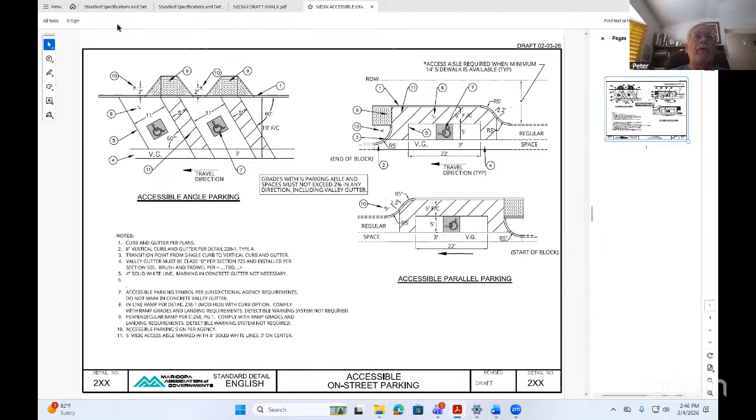Okay, so a little bit more work, but a lot more work. Thank you. All right.

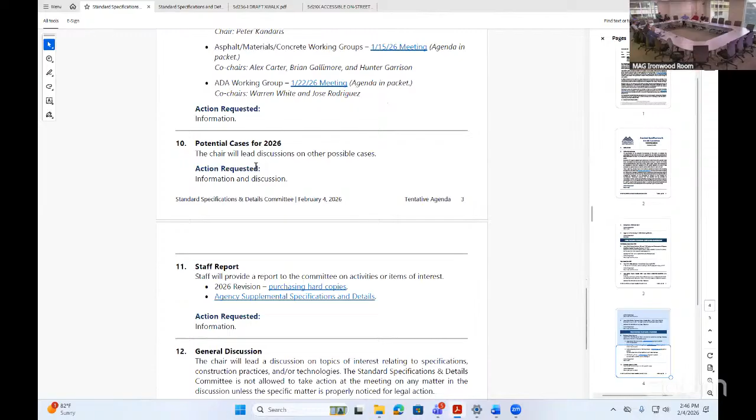Staff report, Gordon. Thank you, Chair. Just a couple quick items. The 2026 revision has been online since last month, but we now have the purchase page open. So if you want to order hard copies to update your books, or update packets for existing books, you can do that now. The binders were on back order, so they're supposed to be delivered by next Wednesday. If you need binders, there might be a slight delay, but you can go ahead and order them and we'll ship them out as soon as we get them. So that's the first item.

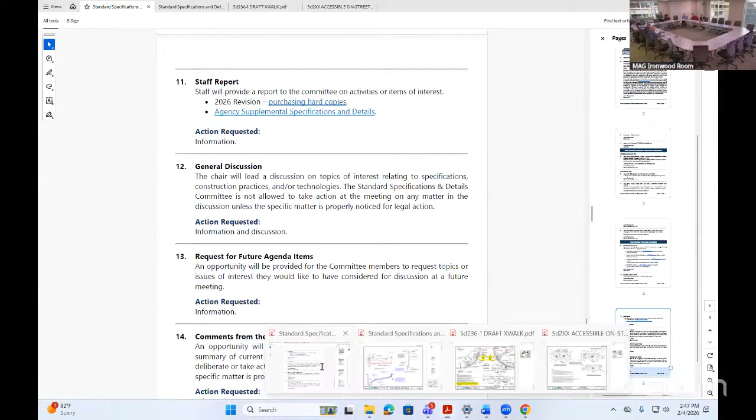Trying to remember what else I was going to mention. Oh yes, the supplemental specifications and details for all the city agencies, member agencies. I went through and checked these and updated a few of them, so they should all be the most current ones when you click on the link. But if you happen to notice that your city is going to an old page or it needs to be updated, please let me know and I'll update those links as well.

That's all I have. I was using this page this morning, and all the links that I clicked worked, so good, I was doing some research. Yeah, I think it is a useful kind of a clearinghouse to find everybody's supplements. It is useful.

Next item, general discussion on general topics related to specifications and construction. I do want to let some of the members know, I think we're planning a presentation, right Gordon, in relation to fiber reinforced concrete. I don't know if we secured the date for next month. Did you ever hear back? I think they are planning on the March meeting, yes. So if you can make an extra effort to attend, I think we'll have Dr. Mobasher from ASU come here and present.

Can I throw in a few things? Sure. All right, thank you Mr. Chair. A couple things. Jim, are you available? I see you there, you're off the phone. I shared this with Gene earlier. Years ago we were pursuing the extra protection question, Jim, that you brought up earlier. And I was able to have in my possession a City of Phoenix project where they put a force main sewer line in a tunnel with a 78-inch water line. So we actually have evidence of it being approved by ADEQ. I was excited to hear that, excited to see that, and encouraged because we now have a case of where it was used. So I'll hand these out to you if you want them.